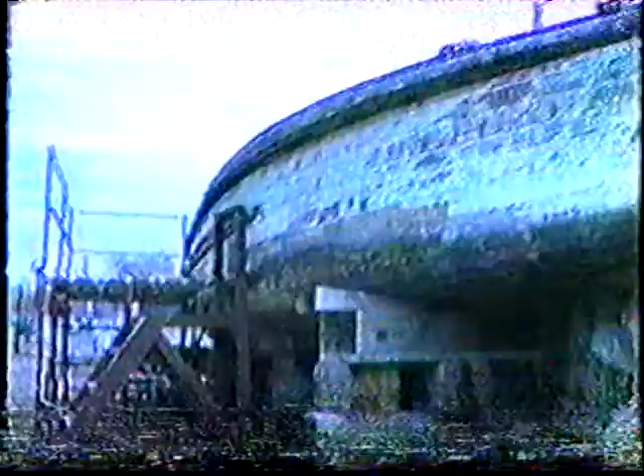Let me find a pointer that'll work well. Right here is the only place where she's opened up, and three-quarters of that was in there when we brought the boat up. Do you think it's been increasing any? It's increased a little bit down here, but most of it was in there when we brought the boat up. So it's going to need some work, because right inside of there is where she let go. She's rotted a little bit in there.

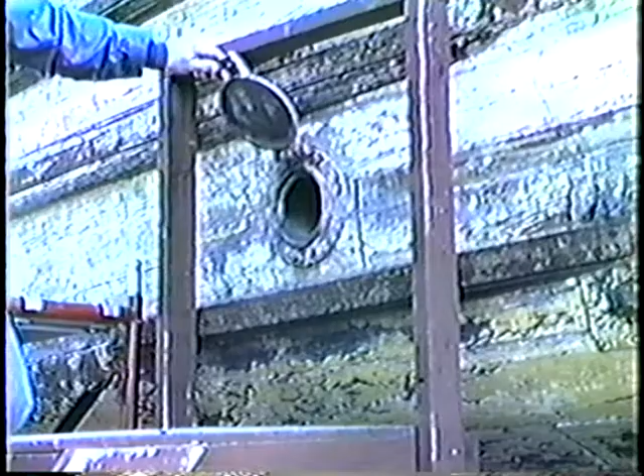Okay, holding tank, wasn't it? I think that's the holding tank porthole. This porthole is the overflow for the holding tank, as near as we can tell. Everything works.

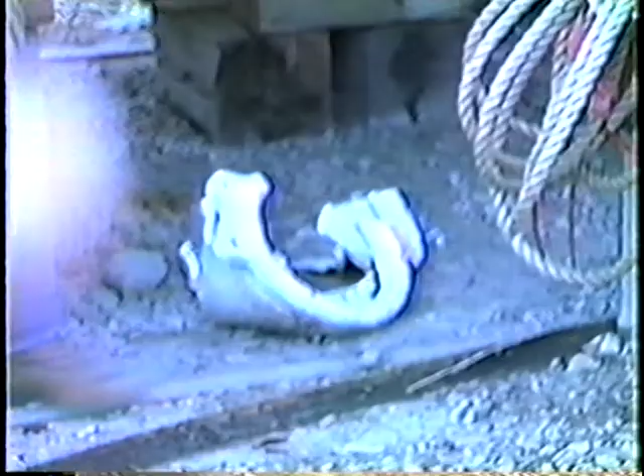I think this is brass also, isn't it? Yeah, it could be. Okay, I'm rolling. One of the two heads, all broken up. That came off of the Minnehaha.

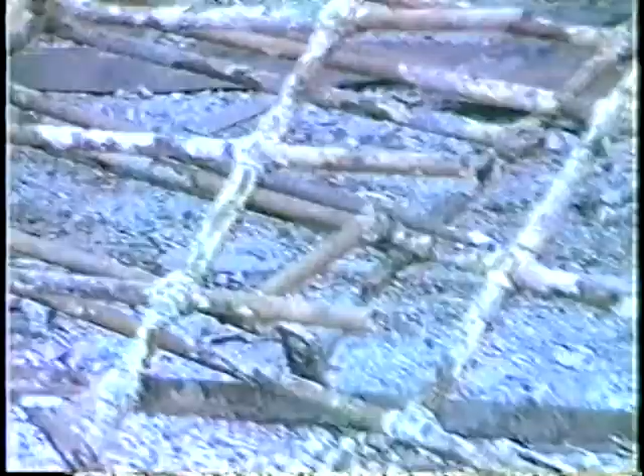Right, okay, we've got the railings here. All those were put inside, thrown inside when she was scuttled. Okay, that's the superstructure there, part of the superstructure, that is.

Okay, good shape, not too much to say about that, you can see that. That's the railing up on top that you found? Uh-huh. Recording.

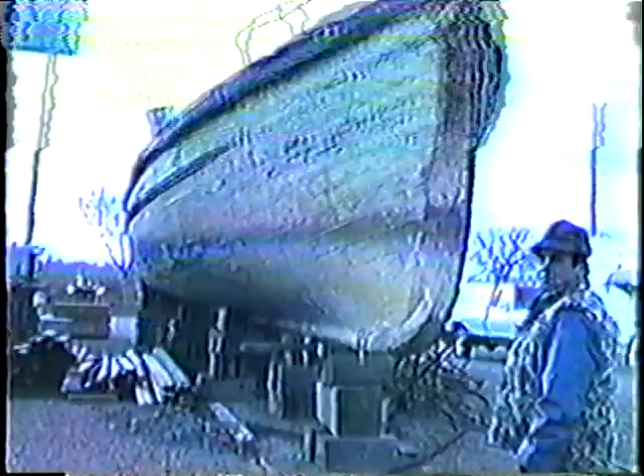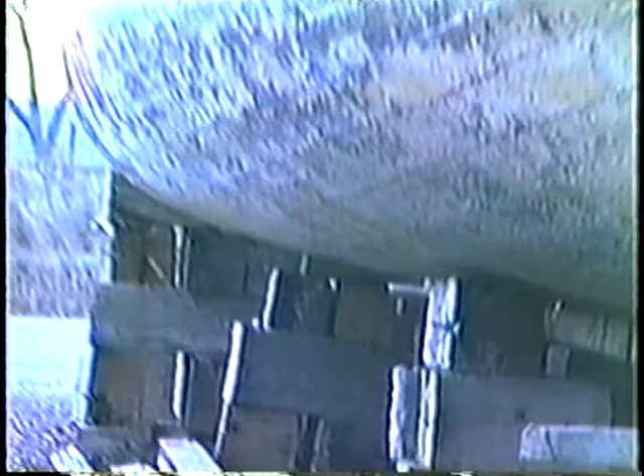This side's pretty much the same, it's in good shape. Not too much to say about it, I guess. There's your planking.

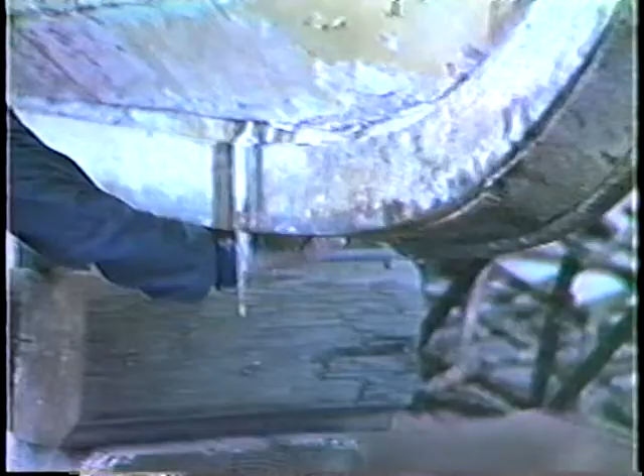The keel, what is that keel made out of? It's all steel. Boy, it's got a, looks like two angle irons welded together.

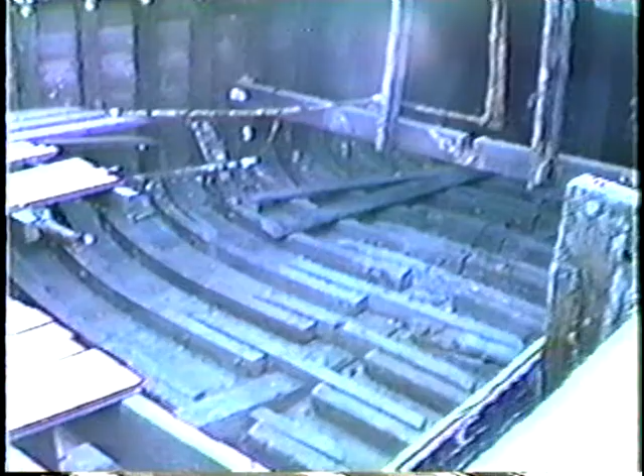Inside of the boat, actually the planking in most cases is pretty good, you can see there.

Now we're at the bow of the boat right now. Stern, or excuse me, the stern. Now moving towards the bow, you can see the planking. We know where the rest of it is, don't we, Bill? Yeah.

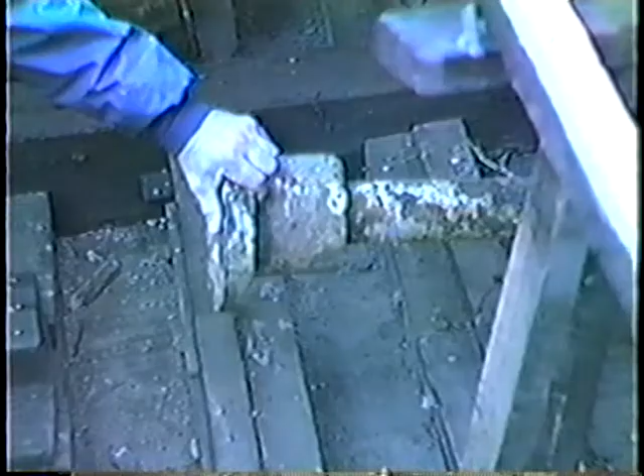And down here, because right there is the shaft. I'll go point it all out. Okay, I'm rolling. Here's the shaft here, that's the rudder shaft? It's a prop shaft. A prop shaft, okay, prop shaft.

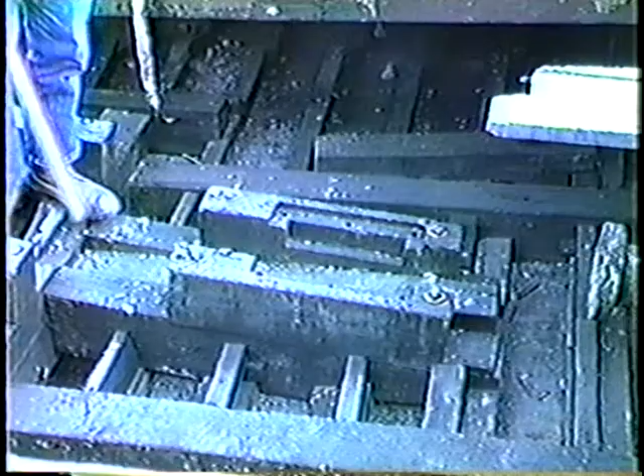This must be a mount for a gearbox, right? Yeah, I think it is. And this must be the engine mount here where they mounted the steam engine, or the boiler, I don't know just how it went.

What about those holes on your right now as you're coming up? Those are the fill holes for the coal bins.

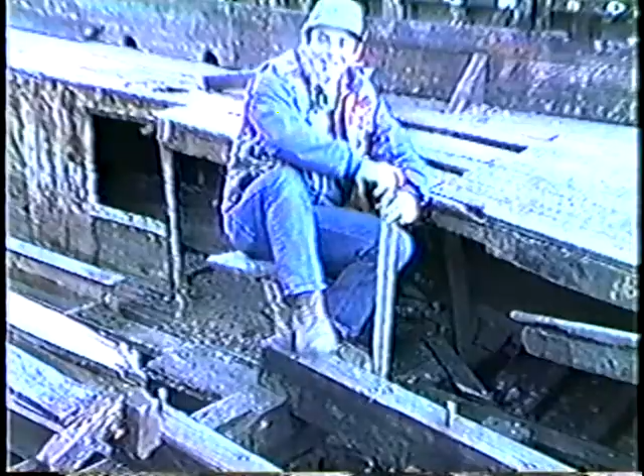And there's a seat, point the seat there. I'll do better than that, I'll sit down on it. Okay, Bill is going to sit on the seat. This is where the fireman sat. Yes, he must have been Union.

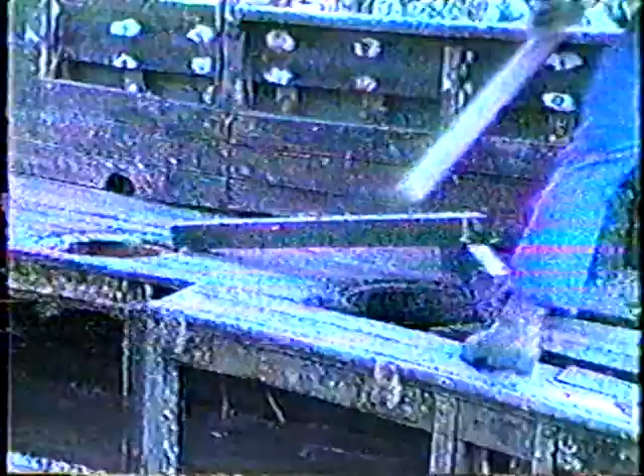I guess we can move on. Okay, pulling. Some of the tie cleats were left on it. Those are steel. Right.

Well, here we are on the... is this the bow, Bill? I really love my boat here.

Right up here, as you can see, we've got the railings. The railings were removed last year, and we said that if we ever get the boat up, we're going to put it back, and that's what we did. We put the railing back on it, and the boat's in pretty good shape, as you can see. A lot of the floor is removed, but that can all be replaced.

Can you get a picture of this ring here? I guess it did come off. There's, I mentioned before, six rings in all.

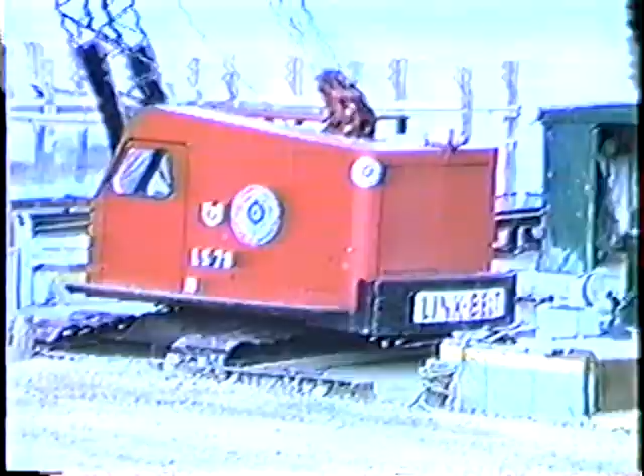This Link-Belt here is one of the three machines that we used during the salvaging of this particular boat.

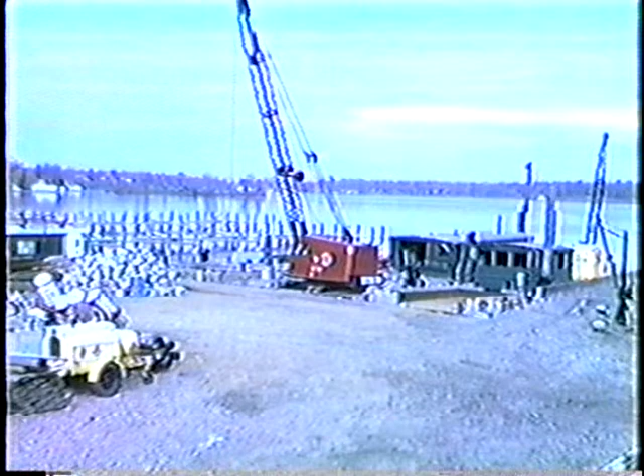Right now we're in the late part of November, and you can notice on the lake even the ice is starting to freeze up.

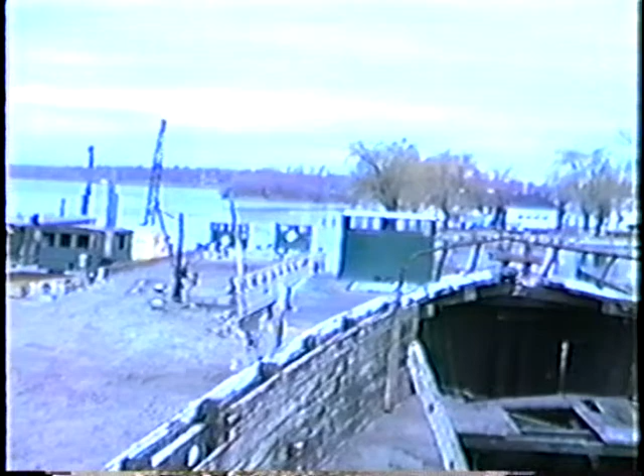Did you freeze up last night, Phil? It froze, well, we broke ice yesterday to get out. We're done, right now we're done. Kind of a nice feeling. We got her put away for the winter. Yeah.

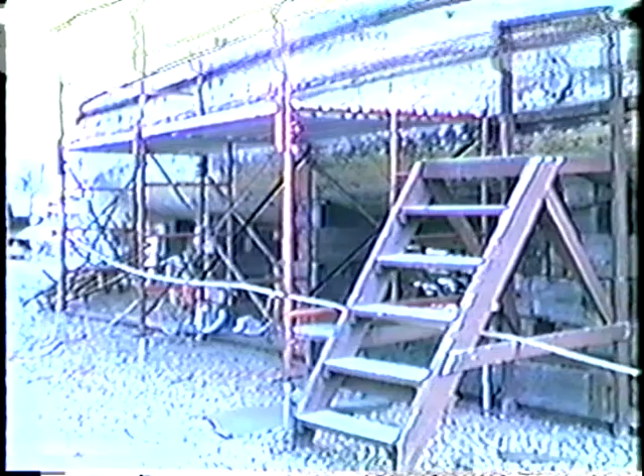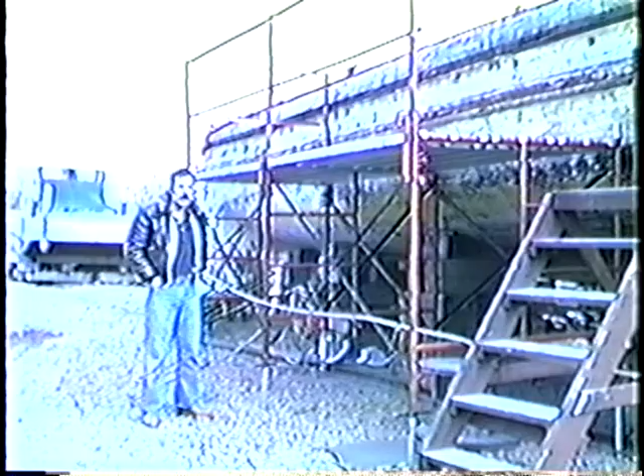Okay, this scaffolding that was donated for us, we've had it now going on several months since we brought the boat up, was donated by Bud Lucky. But spectators have been going up the ramp here to look at our boat, to donate money to raise money for the project.

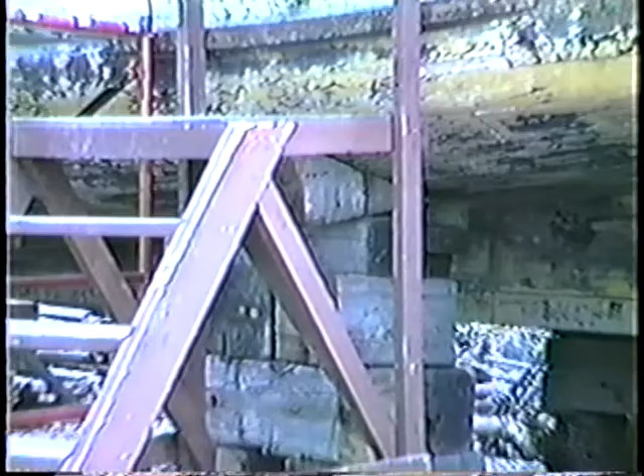I might also point out that underneath, Bill Niccum and his crew leveled off pretty much the keel, so when the drying process takes place, we're able to keep a pretty straight keel for further work on the boat when that time comes, hopefully next year.

Are these the Minnehaha prints or? Uh-huh.

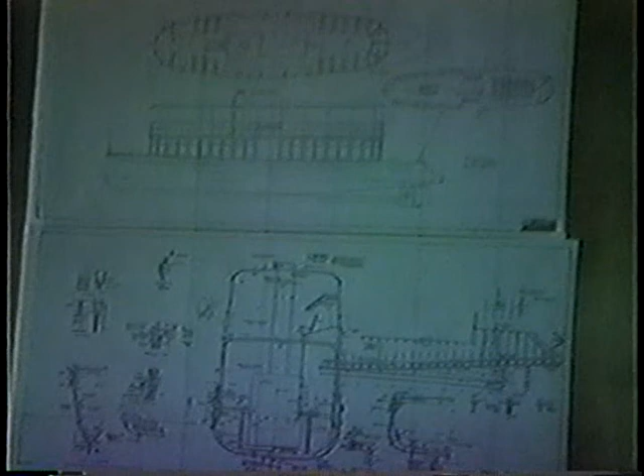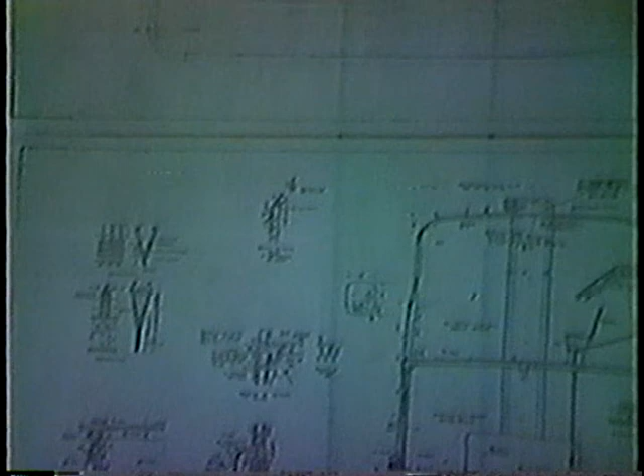So actually, we could almost rebuild it right from these sketches here, huh? These prints, I suppose, if you know how to read a print. Yeah. You got them on yet?